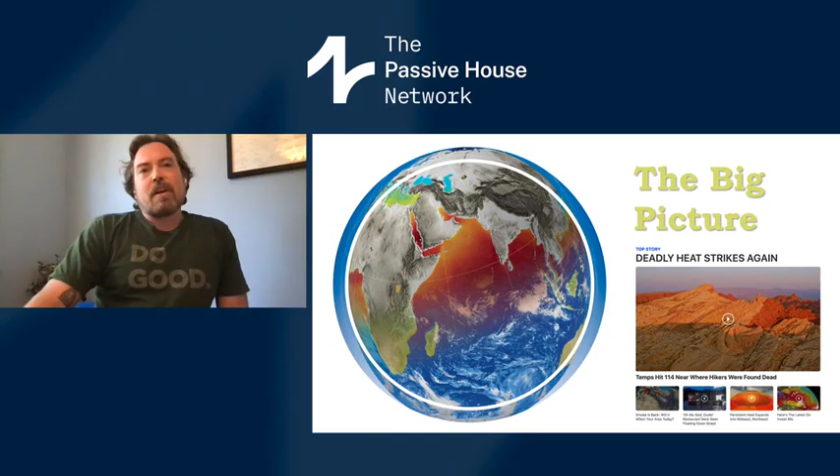So before we dig into the climate mitigation kind of subject, I want to talk a little bit about this right to health and kind of a lean towards social equity in the built environment. The right to health as an official construct—in 1966 the UN put together this covenant on economic, social, and cultural rights, which included a right to health. Turns out the US Constitution actually has a right to health. So all the more traditional conservative builders that love the Constitution should say, actually, you know what, our Constitution requires that we build healthy buildings. So that's cool to know.

The way I like to put this is that all people should have the right to health in the homes where they live and the buildings where they work. So what is healthy? It's a lot more than the lack of unhealthy ingredients. To deliver health in a building requires using good ingredients, but also putting those ingredients together through proper design to make sure, say, rot and mold don't occur. There's hundreds of things that go into this, really, but just some basic top-level summary.

Enclosure systems need to avoid toxic ingredients, so no more stuff like spray foam, and they need to dry faster than they get wet. We need to optimize indoor air quality through having non-toxic finishes, furnishings, and cleaning throughout the building's operational cycle, and continuous heat recovery mechanical ventilation. Most audiences, I have to fight for this one—I think in this audience, that's pretty much a given.

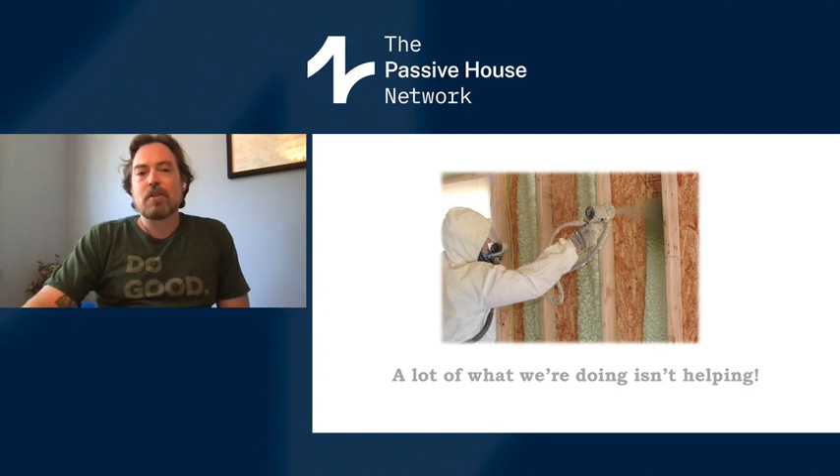Unfortunately, too many buildings, even certified ones, aren't always delivering holistically. I know we put our best efforts into doing this. Most of the colleagues I've worked with in this industry for a long time do incredible work. But there are two failure points that occur still too often: moisture-driven failures and health impacts associated there—just general health in buildings. Are the materials being used the healthiest materials for the occupants? And then, as my buddy Chris Magwood put it, the carbon elephant in the room: what is the embodied carbon impact of the materials we use to deliver high performance buildings if we're looking at the whole life cycle?

This can be summarized as what I call the efficiency trap. In the 1970s, we thought: shoot, bad building's not working out. We need good building—it should be healthy, comfortable, affordable, low carbon, durable, socially equitable. Great, but good needs to be quantified. Green's too political, so let's talk about it as energy efficiency. Cool, solid plan. How do we do it?

Let's maximize efficiency, collect data focused on proving efficiency was delivered efficiently and that it made people more efficient. And then you're kind of starting to think that's not really the original goal. And it's like, okay, well, we'll sneak in the green—if it's efficient, it does everything good, right? Efficiency solves all problems. Okay. And then, wow, efficiency really caught on. There's certification systems, et cetera.

And now Passive House perfected efficiency. The world is saved. And then, oh snap, it turns out that high performance just amplifies things. It might look really nice in energy models, but we need to take a much broader perspective of what materials are being consumed, what carbon impact they have, what health impacts they have, and look at it from a more holistic standpoint than efficiency alone.

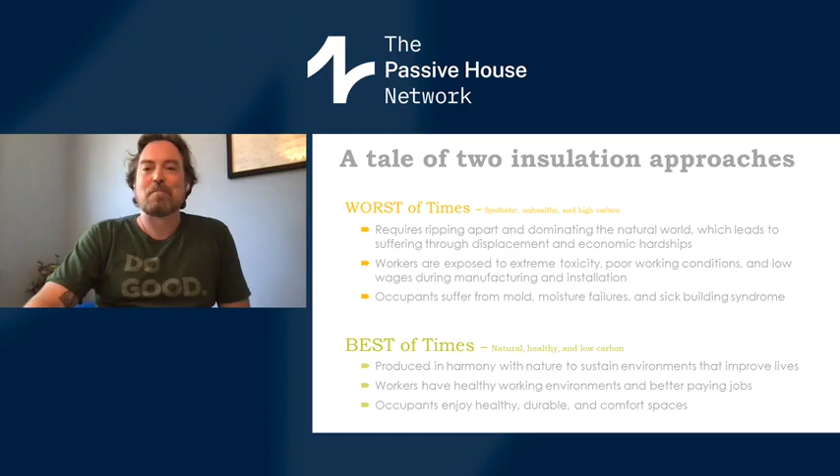One of our biggest problems is that we dissociate ourselves from the reality of things that are designed. And then when it gets to the job site, it still happens because we just say that work sucks, let the less privileged people do it.

To me, this is unacceptable. It's something we need to stop.

So the 5 factors, what are they? It's a design tool, it's not intended to be a certification. It's a guide for integrated design of holistic systems, and mostly for choosing materials that are actually going to meet your project goals.

One of the things worth mentioning is it works with high performance or low performance budgets. I know we're focused very much on high performance, so I won't spend too much time on this, but it is worth mentioning that good low performance actually can be great.

It's cash flow positive from day one. We're 105% net positive, including charging an electric car. And it's a healthy, durable, comfortable, and extremely low carbon home.

So for people who can't afford high performance, good building is still an option. In other words, the way we put it is everybody gets good building, right?

We still encourage every building to try to meet Passive House standard. We want buildings to maximize their efficiency, but sometimes people can't afford that complication.

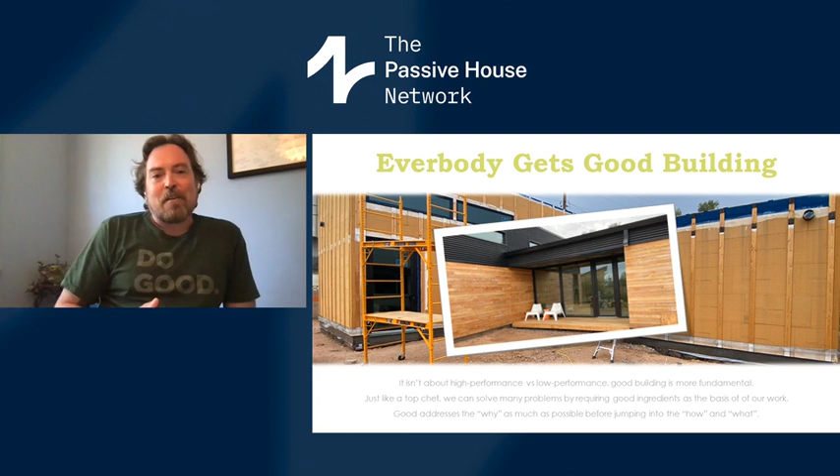So Zack Semke had put this really well talking to Chris Magwood, I believe this was on Twitter a while ago, as a concept of what good building could be: passive house plus clean energy plus carbon storing materials equals good buildings, right?

So dig into this stuff. The clean energy side and the life cycle carbon impact, including upfront embodied carbon, or what's often now called material carbon emissions. So the first step in my process is calculating for context and climate. What kind of building is it? What kind of operational energy are we expecting it to consume? So what's our predicted EUI? Converting that to kilowatt hours per square foot per year so we can look at the local grid.

And say, okay, how much carbon is there per kilowatt hour? What is the pounds of CO2 equivalent per kilowatt hour of electricity? So instead of just thinking efficiency saves some carbon, let's actually look at how much carbon is saved per year by calculating it based on the local grid the building's connected to. Now if you're off grid, this is a different thing. But if you're connected to a utility, they have to provide these numbers every few years in power mix reports, so you can find these numbers and do this.

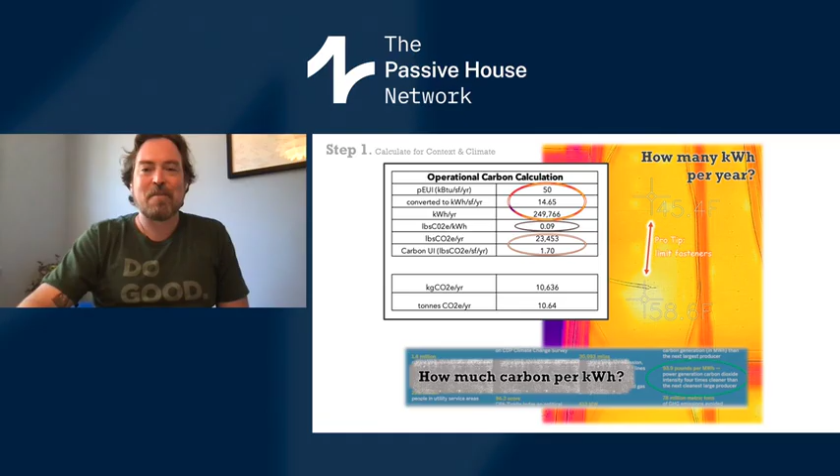The first part, which is what we typically now call upfront embodied carbon or material carbon emissions, is the process of extraction, processing raw materials into building materials, manufacturing those into final products, transporting those to the job site, and then installing them in a building. There's also an end of life carbon impact that we need to dig a lot more into, but we're not going to focus on that today.

So how do we know these things? There are global standards for this. They're summarized in what are called environmental product declarations, or EPDs, which usually include what would be considered a life cycle carbon analysis as part of it. When we're looking at the material embodied carbon or material carbon emissions, we're usually looking at a specific part of these EPDs that typically represents about 70 to 80% of all the life cycle emissions.

So this is trying to take a look at the biggest chunk that we can understand most accurately. I will say that this type of analysis has reached the point where it's meaningfully accurate, but it has a way to go in precision, as all good science does.

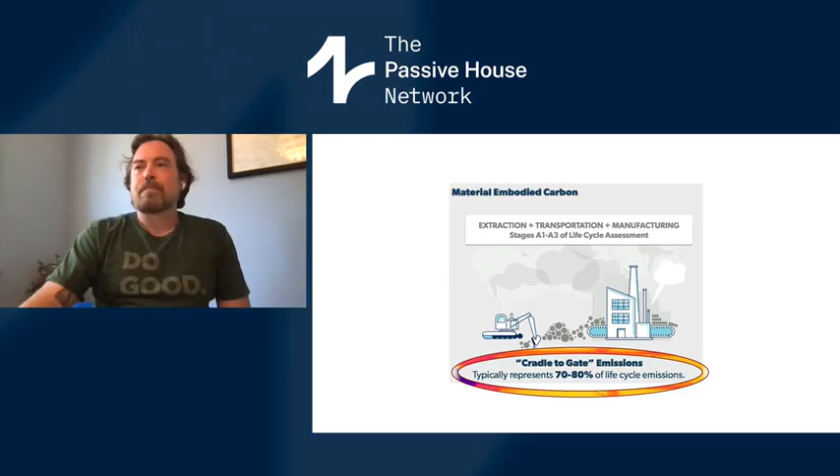So one of the areas we found really worth focusing on is the embodied carbon of insulation. Concrete can be really hard to change, really hard to control what the local concrete companies are providing as far as mixes are concerned. I definitely suggest trying to specify low carbon mixes.

They're more available now, but who knows if that's feasible. Finishes, clients tend to have a lot of strong opinions on, but no one's really caring that much about insulation. And it really is kind of our secret weapon against the climate crisis to switch from high carbon impact insulation to carbon storing insulation materials.

So some materials, spray foam, XPS being the biggest culprits, have very, very high carbon impact. I like to think of this in pounds per meter cubed or something like that. That's the general way we think of these things. Kilograms is often used, but Americans understand pounds better, so it's usually worth converting.

And then we have carbon storing materials: wool, wood fiber, dense packed cellulose, cork, hempcrete, straw bale. Straw bale is amazing, what you can do with it, as I'll show you at the end.

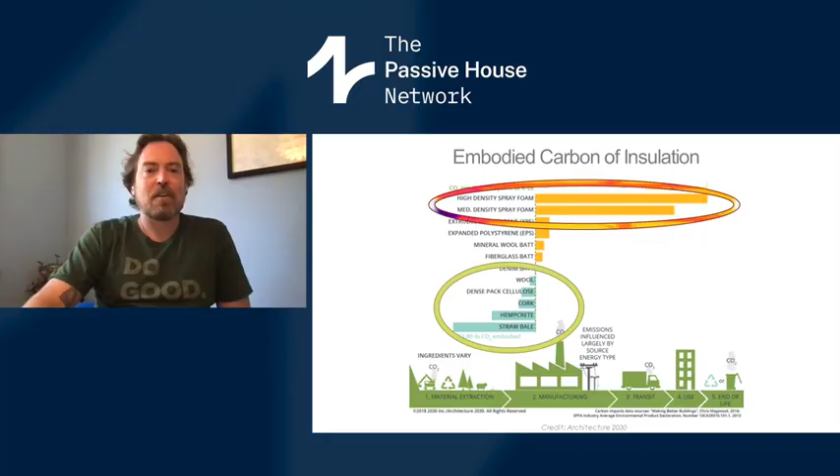So there's a tool now put together by the Builders for Climate Action. It's free to use. It's called BEAM, and it stands for Building Emissions Accounting for Materials. What you do with BEAM is input a bunch of data into effectively a fancy Excel spreadsheet. It's now on Google Sheets.

And after you put in all of your project info into the spreadsheet, you then go through different tabs to select your material choices for different elements of the building. So showing an example here, looking at subgrade perimeter insulation for slabs, slab and grade foundations. This is our Vali Mews slab.

If you use EPS foam board, on average that's about 2,152 kilograms. If we had chosen to use XPS foam board to get that theoretical extra R1 per inch compared to EPS, we would have had 10 times the upfront carbon impact, which would significantly affect our overall outcomes of this building. So this kind of decision is extremely important—which material you use.

And the one with the higher R value isn't always the lowest carbon overall. Often it isn't actually. So let's look at exterior insulation.

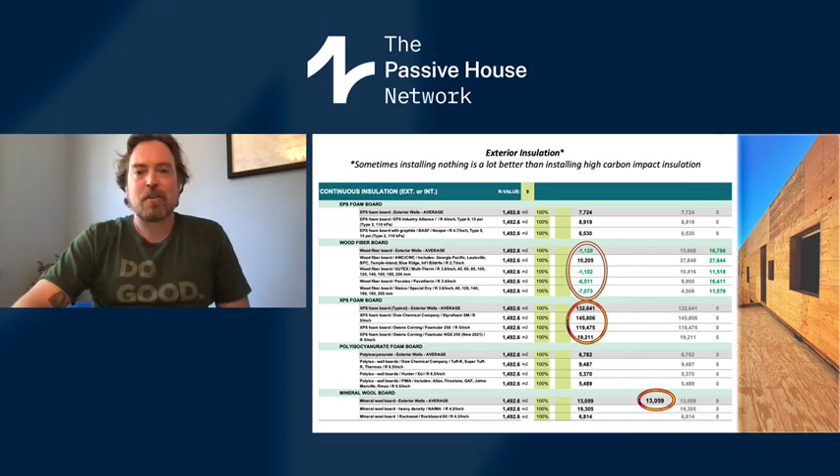Mineral wool is what had been originally specified on our project by the architect. A lot of locals wanted to switch it to XPS, but as you can see, that's an insanely high carbon impact. We ended up going with wood fiber board because we had the ability to find net carbon storing materials that helped us save a tremendous amount of carbon impact on this project.

A little thing I like to mention, because people always bring up aerogel or vacuum insulated panels for their super high R value—these materials have just as high of a carbon impact as their R value number. What I'd say is space age materials aren't worth using on Earth. We don't need that extreme of a performance, and it's not worth the carbon impact.

So looking at the carbon use intensity for 20 years of a Toronto two-story home—this is something I'm borrowing from Builders for Climate Action—high carbon, low efficiency buildings, obviously, are the worst. But what's interesting is that a high carbon, high efficiency building, like a passive house built with spray foam and XPS, really doesn't save that much carbon overall. This is looking at a 20-year life cycle here.

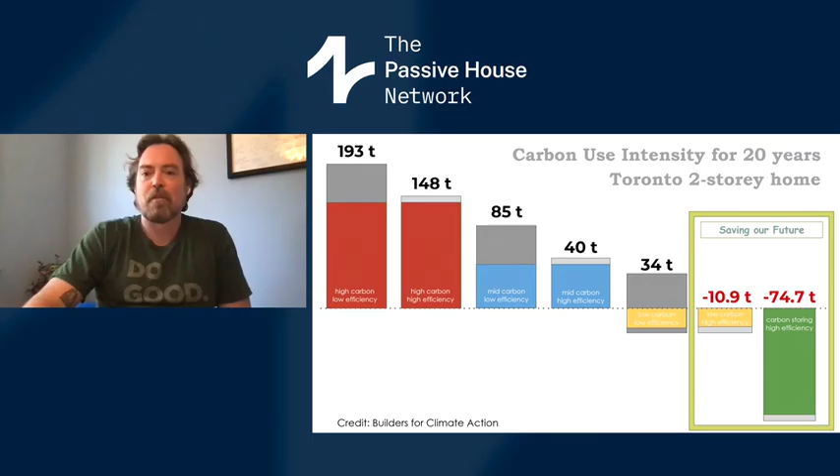Mid carbon, low efficiency buildings save a good amount of carbon. Mid carbon, high efficiency buildings—now we're getting somewhere, that's pretty exciting. Low carbon, low efficiency, interestingly enough, is actually way lower carbon impact than high carbon, high efficiency. But where we really need to get to is either low carbon, high efficiency, or carbon storing high efficiency. This really gives us a good shot at saving our future, or however you want to put that.

So this is that backyard cottage I showed you earlier. If we had used Phoenix average building materials—spray foam, XPS insulation, and all that stuff—we would have had 152,000 kilograms of carbon dioxide equivalent up front, and that would have represented 14 years of operational carbon payback.

Instead, by using low carbon materials, wood fiber, sheep wool, that kind of stuff, we reduced that to less than 30,000 kilograms up front, which represents a full carbon payback in less than 2.8 years, even in Phoenix, where there's actually a very, very low carbon per kilowatt hour grid.

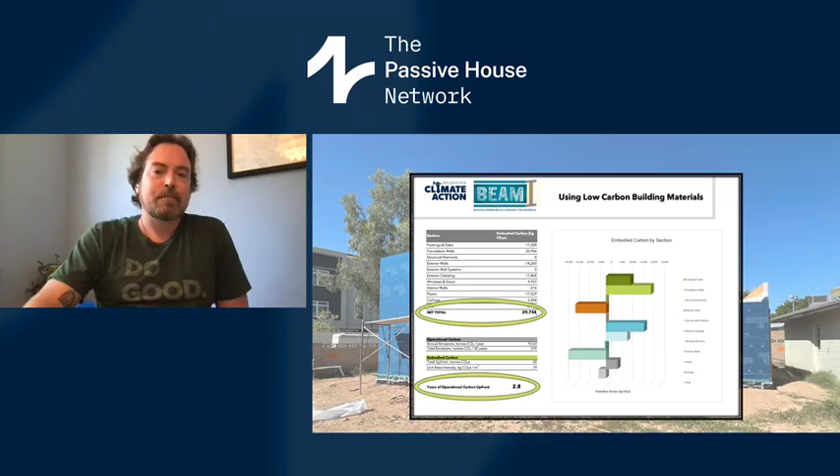A huge joy and honor recently is that our Vali Mews project, the one we're doing in Phoenix that I've talked about a little bit, is 4 units intending to fill in this concept of missing middle housing. It really is a form of a new all-American home that we're trying to promote. The other thing we're trying to promote about it is not just building this micro community, but having the best practices of health to the point of what we call performance enhancing building.

And we're also trying to show that you can really minimize the carbon impact up front using relatively straightforward construction approaches.

RMI, Rocky Mountain Institute, wrote a report called The Hidden Climate Impact of Residential Construction. If you haven't read this, please go download it and read it—it's incredible. But the key thing I want to share today is they came up with an average upfront carbon impact per meter squared, determined from 921 model homes across the US, Canada, and Europe. So we're looking at 184 kilograms of CO2 equivalent per meter squared as this average number we can use. So now we have a baseline to compare things to, and that's very exciting.

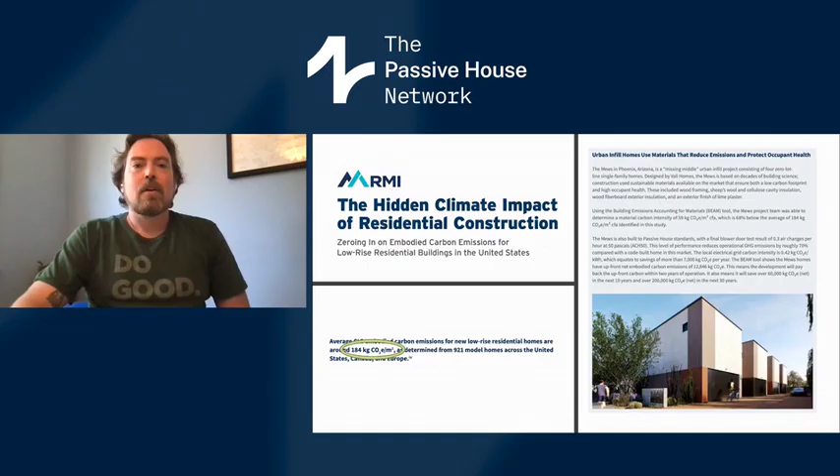So looking at our Vali Mews project, if we'd used foam insulation for this project, we would have ended up with foam in the walls, the roof systems, et cetera, creating a total of 388,000 kilograms, which ends up being 447 kilograms of CO2 equivalent per meter squared. So that's almost—or more than double, rather—the average upfront impact. That is insane.

Our intent is to help build a healthy building that improves the world. Clearly, neither of those outcomes would occur with foam insulation.

So looking at concrete, something that we all talk about as being one of the highest carbon impact things, what was really surprising to find out is that the foam insulation in this BEAM model, using market averages for XPS, closed cell spray foam, etc., would have been over 10 times the impact of the concrete used in this building. So it turns out concrete, yeah, let's solve that.

But the first thing we need to do is solve insulation. It's way easier also, because concrete is a great building material other than the carbon impact, whereas foam insulation doesn't typically meet people's durability, performance, or health outcomes either. So there's huge benefits in switching to carbon storing insulations.

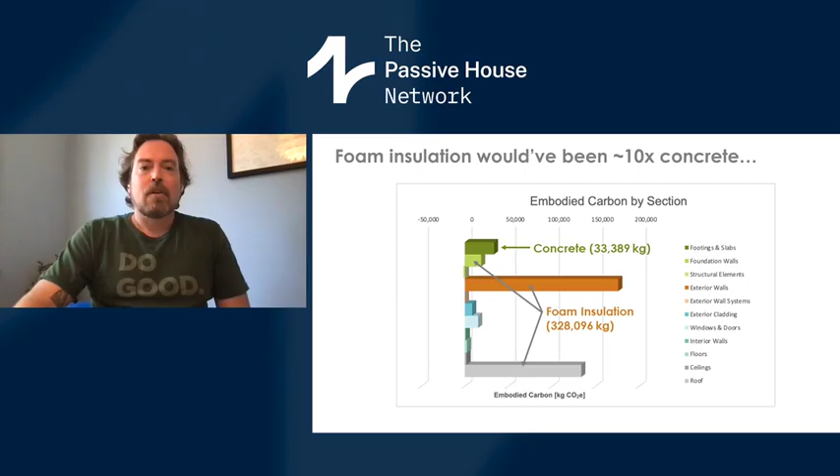So obviously we used good insulation. This is my older daughter stuffing some Havelock wool in a little gap space. And there's me walking around the perimeter looking at some of the wood fiber insulation that we had to do some pretty advanced stuff to protect from moisture. But anyhow, that's not this presentation.

So Vali Mews with good insulation, we still had the same footing and slab impact. We used a recycled EPS for our foundation walls, wood fiber for our exterior walls, and blown cellulose for the roof system. By doing that, we were able to reduce concrete so it's now 65% of the total impact, rather than only about 10% of the total impact in the foam scenario.

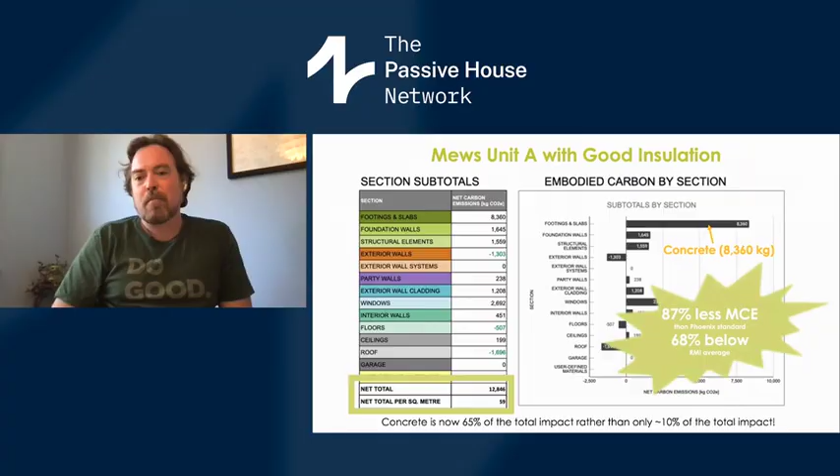But more importantly, what we were able to do is create 87% less material carbon emissions than the Phoenix standard, which is 68% below the RMI average that I presented of 184. And this is per square meter.

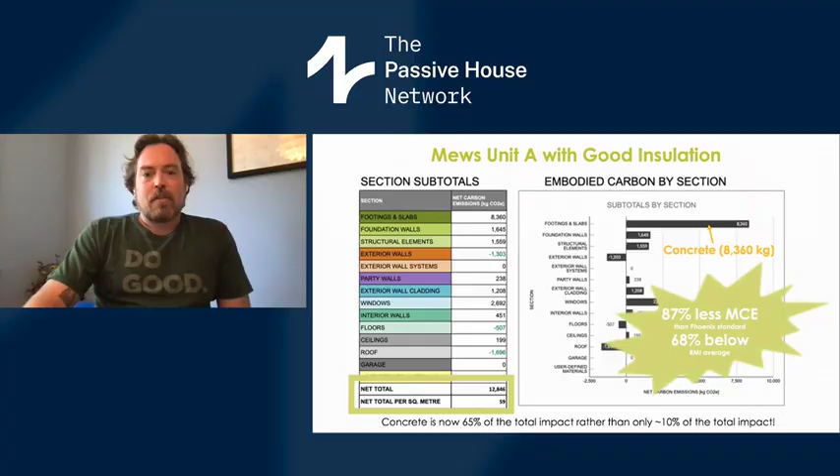Here's the living room with a wood slat sound wall that's placed over sheep wool insulation. The sheep wool's there for the low carbon, the health, and for helping modulate humidity levels. We found our buildings with the wool insulation exposed as such have been able to stay in a more comfortable humidity level, even though it's very dry outside in Phoenix.

One of the big problems we have is humidity levels are too low, and that causes viral transmission issues, itchy eyes, all kinds of gross stuff if you have humidity levels that are too low. So the point is, the healthy low carbon materials have worked way better than conventional synthetic materials in the performance they've delivered and also the carbon impact.

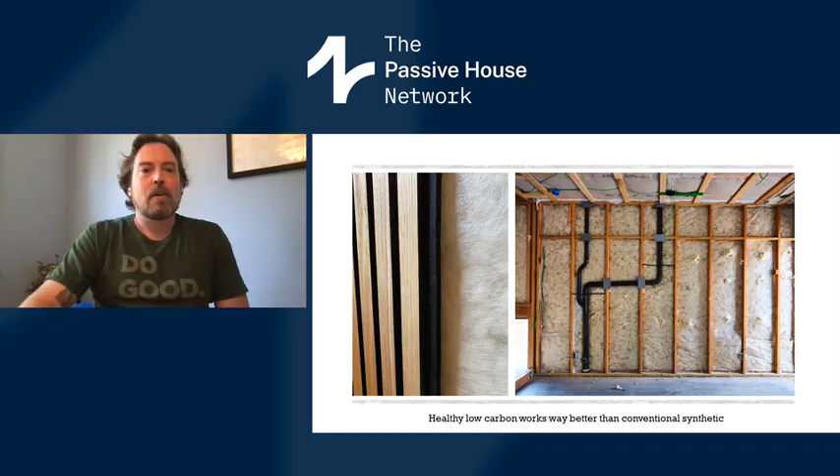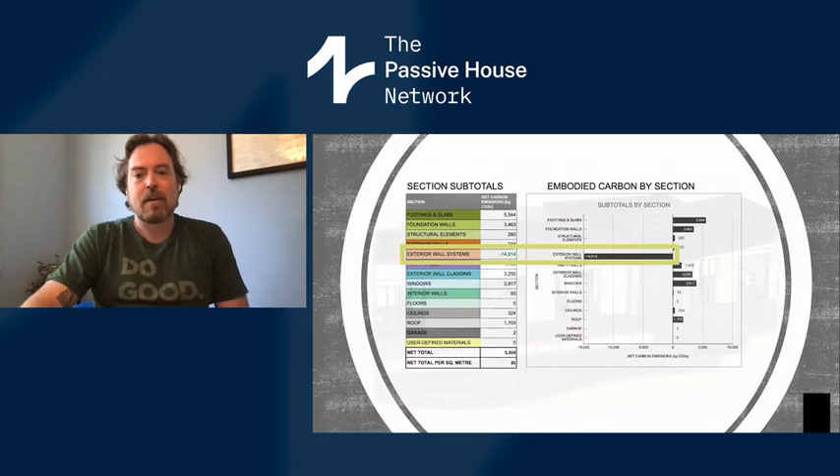So up next, we have a project called Dancing Raven. It's going to be with rammed earth and straw bale, but also meeting passive house levels of air tightness and insulation. Using those materials, straw bale in particular, allows us to save a crazy amount of carbon impact, which brings us all the way to 81% less material carbon emissions than that RMI average. So this is another step in the right direction.

Still haven't gotten to carbon neutral up front. We're working on trying to get there.

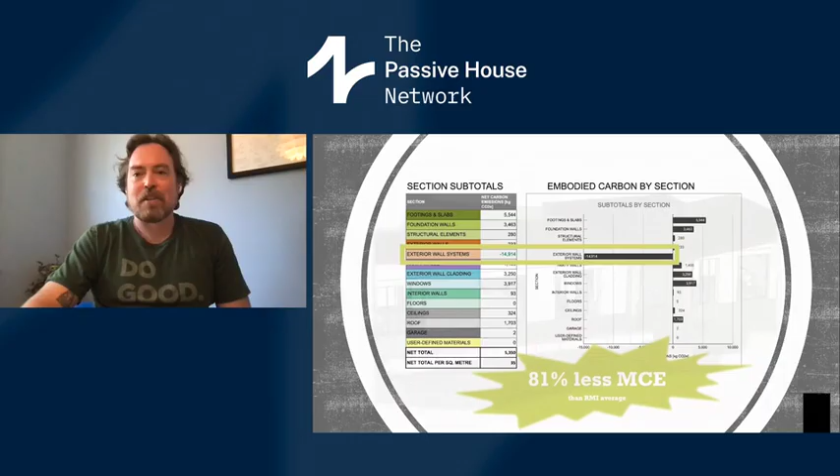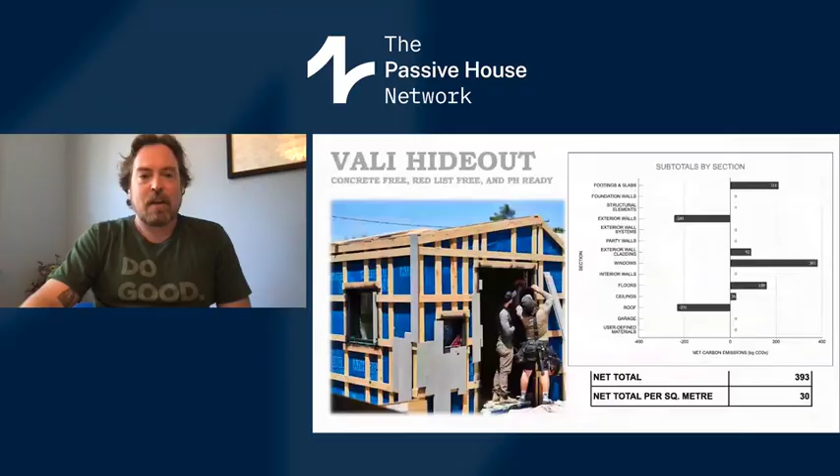And then another project we're working on, we're calling it the Vali Hideout. Shout out to kind of the desert cowboy finding a shady place to hang out. This is a concrete-free, red list-free, and passive house ready building. Obviously, with the size of a backyard shed or office, passive house is a very tough thing to do, but the air tightness levels are going to meet that. We're using T-stud, the full system, to reduce thermal bridging dramatically, using passive house compliant windows, etc. And with all of that put together, just blown cellulose insulation. So very standard, very easy to build.

The Phoenix carpenters have had no problem with this, whereas the other stuff we've done, they've definitely had some problems with. We achieved 84% less, but even the ground screws still have some carbon impact. So it's less than concrete, but still stretching towards that zero or carbon storing up front.

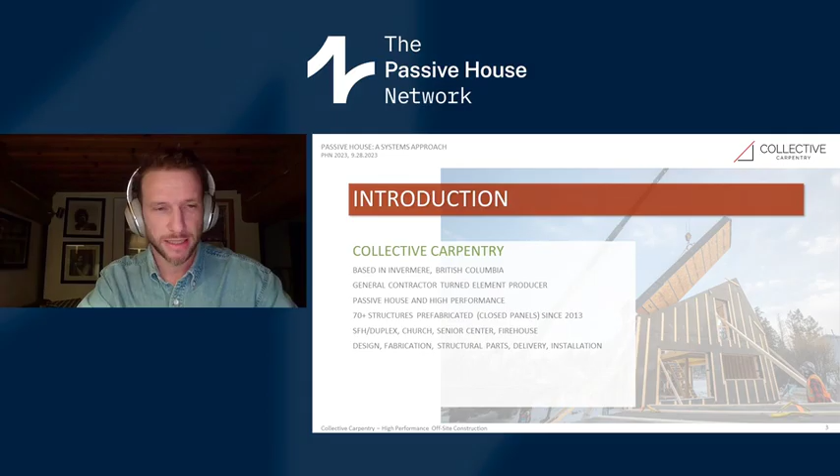In 2022, we released some pre-designed homes, and this is really our effort to just put into practice everything we learned about good design and good material selection and good building systems, and really offer something to the market that at least acts as a good launch pad from which to find something that clients are looking for, because sometimes they want a good home, but a custom home design process is a little bit out of reach.

We also last year revamped our standard details, which is partly for internal use, just for clarity of sort of the direction that we're going, but more so for outside designers we work with, who do anything from single family homes to larger multifamily projects. This is all applicable.

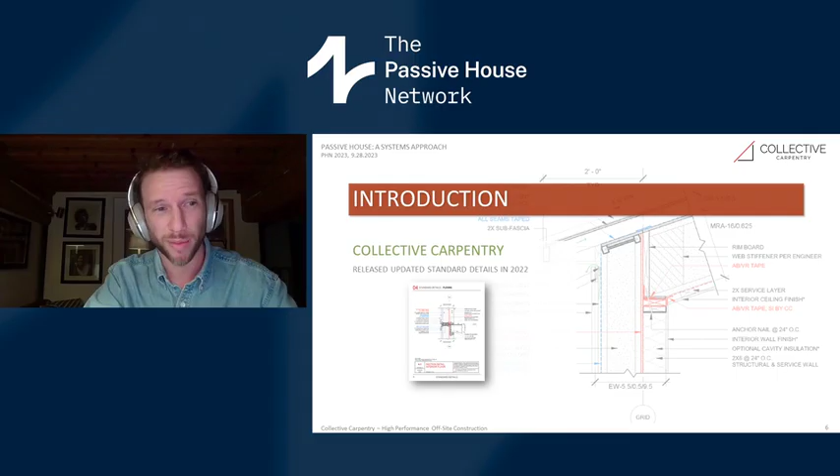We're currently working on our production improvements, and this is like how we're focusing on improving quality, speed, capacity, etc. Things like monitoring and forecasting of production in real time, reorganizing how we prep material for our production process, running 2 production lines, incorporating European equipment for moving panels, stapling, nailing, those kinds of things. Starting to get to this light manufacturing without necessarily full automation.

So for some definitions, the first question I had was, okay, how should we define this all-American home? And I just kind of cheated and asked ChatGPT, because I love ChatGPT, and ChatGPT gave me some answers. Heather suggested I shouldn't use this, but I just went ahead and did it anyway.

ChatGPT sort of said some things about single-family dwelling and architectural styles, some things about vernacular architecture, picket fence, the American flag. So what I thought is let's use this, we'll come back to it and discuss what about this might need to be changed with this current ChatGPT model of the all-American home.

Now, if we're going to overhaul it, overhauling is really the thorough examination of machinery or a system, with repairs or changes made if necessary. So we're going to be thinking about the home as a system on many levels, and the process of overhauling it being really looking at the system and asking where and why it's not working.

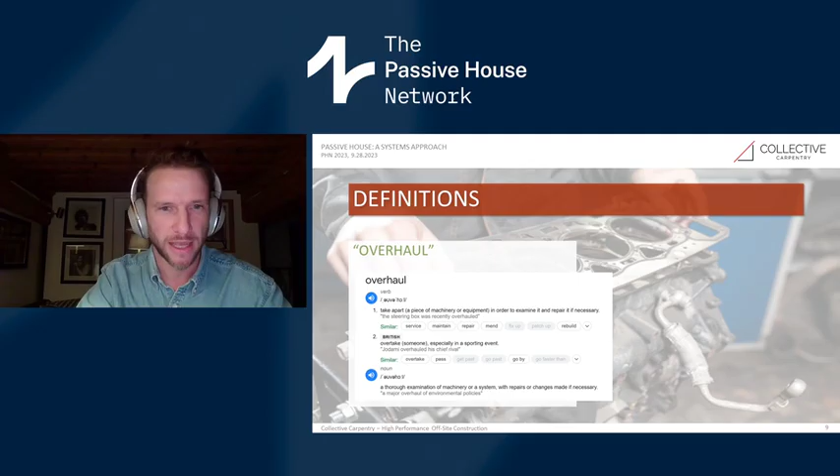And if we're going to take apart a system, let's agree that a system is a complex set of relationships and interactions between different parts. This can be large scale, like the climate system, or small scale, like a local food system, or maybe a ventilation system or an air tightness system. But it's organized, it's working together. It creates a whole that is greater than the sum of its parts.

I also want to briefly introduce some concepts around patterns, systems, and quality building. I was really fortunate to take a 4-day course with Monte Paulsen and Passive House Canada last fall about pattern languages in Passive House, and how identifying and recycling these patterns is the best, most reliable way to do Passive House multifamily at minimal cost. I loved thinking about these really specific and broad patterns we see in smart design, and how crucial they are to creating good projects that are built efficiently. So for anyone interested, take this course, read this book if you haven't already.

These are some of the patterns that Monty presents. Some of the things he calls patterns are, to me, maybe more systems, and I'll get into that in a second. I dug into this a little deeper out of curiosity and got into reading The Timeless Way of Building, his other seminal work from Christopher Alexander. And I really enjoyed his higher level thinking about the quality without a name.

And to me, this is what we need to be striving for as we look to revitalize the all-American home. I particularly like this use of three terms to describe quality without a name. You can really feel when a building is alive, it feels whole and it's comfortable. And on the contrary, you can really feel when a building is dead too. So keeping this in mind...

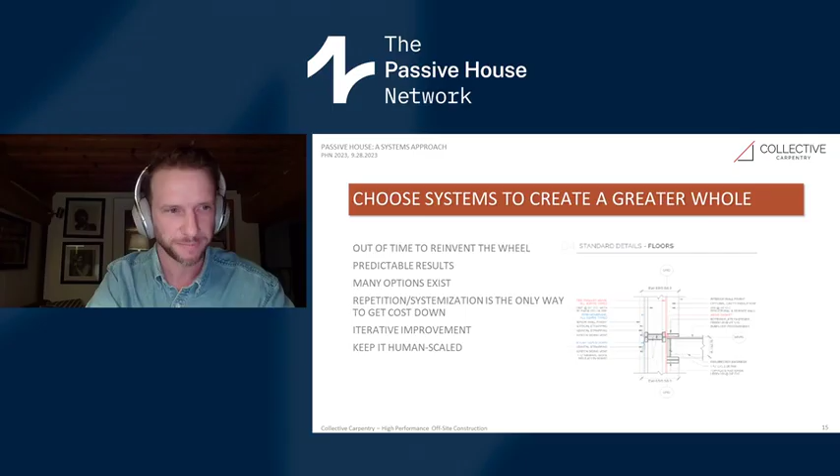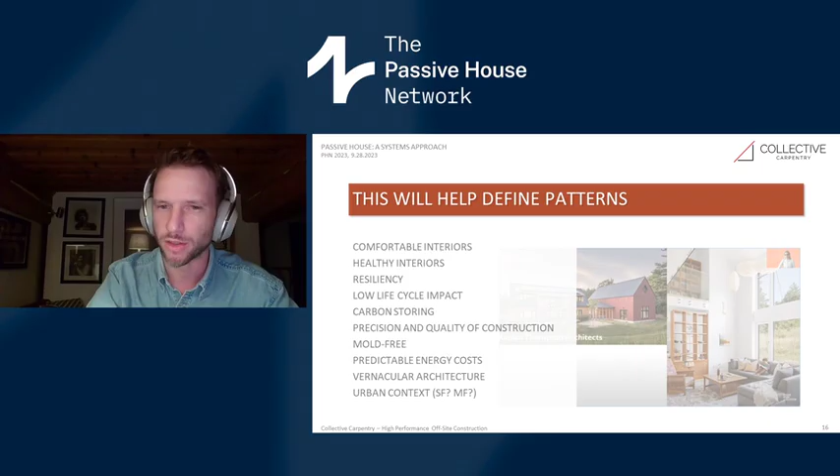Choosing these generating systems, as Christopher Alexander would call them, will lead to patterns. We've already seen these patterns become languages in passive house architecture, like Monty described in his presentation, and like Tessa Bradley of Artisans Group described in a recent presentation. But we need to see more patterns that also deal with quality, accessibility, and other things that passive house alone can't necessarily deliver. When we do, we'll create an all-American home that feels relevant and stable for the 21st century, one that lasts and is specific in its intention to provide a better quality of life for people on this planet, and that's what we're working towards here.

Now, in order to be more relevant in a changing climate, we need better building performance. So what's the best system? I think a lot of us are here because we agree that it's passive house. Why? Because it's really good at predicting results. Many of you who just started getting into this saw charts from European buildings showing a really close match between what the methodology and model said and what the actual results were. So that predictability is really important.

But what's passive house without a good system of execution? It's a nightmare. It's slow, it's expensive, its quality isn't where it should be, and it's really out of reach for most folks. So we need good systems to improve that time, cost, and quality.

This is where we feel offsite manufacturing systems come into play. They offer more predictability, and that can help give confidence to designers and building owners to do passive house. But in order to address local needs, it can't be rigid. Christopher Alexander says nature never produces the same thing twice—every leaf is different—so we can't do cookie cutter. We need flexibility, and we think prefabrication, the panelization of building elements, delivers this design flexibility so we can adapt to local and individual needs while still giving that predictability and confidence to execute the passive house principles.

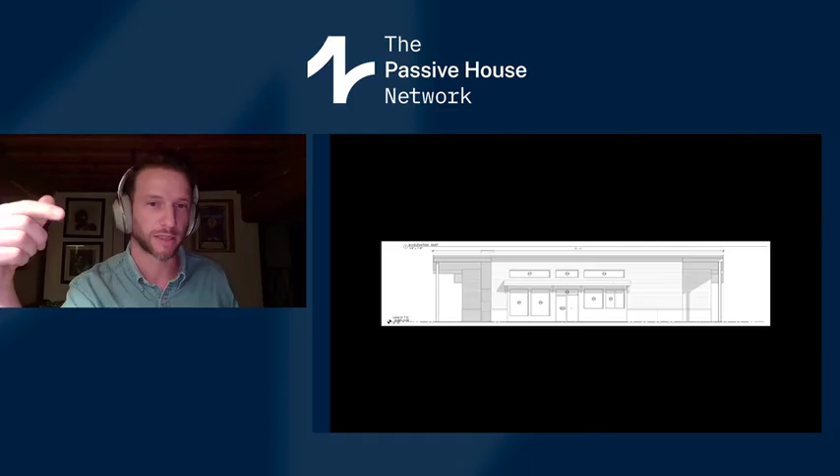I'm going to hand it off to Heather now, who's going to talk to you about how we incorporate this Collective Carpentry building system into the projects we design.

We still do plenty of custom homes and multifamily structures as we grow, but I think these homes offer something that should ultimately be more prevalent, as they are in Europe, where companies like Baufritz are building almost all wood-framed houses this way. My dream is really to see other small companies get into this market in North America—go inside, build panels, learn some tricks, and offer a better solution to building a quality home.

Thank you. Thanks, Craig. My name is Heather Mott, and I'm the in-house designer with Collective Carpentry. I'll be talking about how we at Collective think the new American home should be built. Spoiler alert: it's passive house, with prefab construction and low embodied carbon materials.

Our goal at Collective is to advance the industry in a way that is symbiotic with the environment. There are a lot of barriers to getting there, so to create the path of least resistance, we've developed a design guide, standard details, and pre-designed homes. I'll follow up this information with a case study and supporting analyses.

For those of you who haven't worked with prefab yet, we build the insulated, airtight structural envelope as panels in a shop, ship them to site flat-packed, and install with a crane, going from a foundation to a fully enclosed structure in just about a week or two.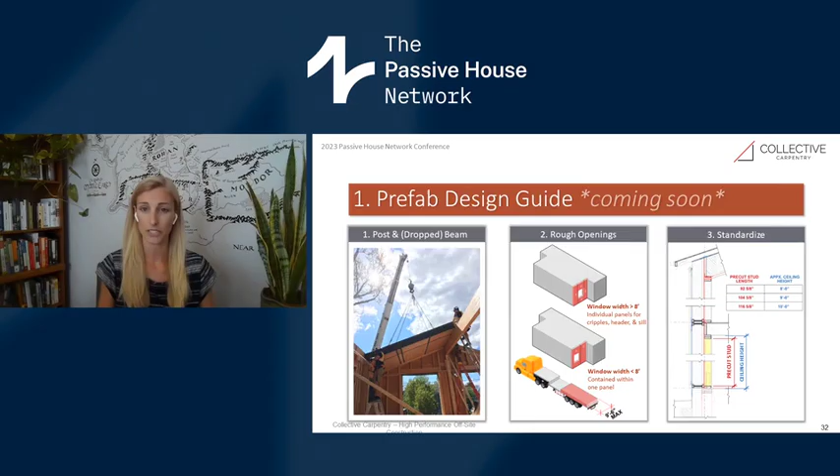As Craig mentioned, the standard details are another resource for architects and engineers to design for prefab. They show how panels integrate with other envelope elements, such as foundations and windows. I should really call these standard-ish details, because they're very adaptable—we don't want them to dictate the design. I learned a lot of this information the hard way, and we made this document so that you do not have to.

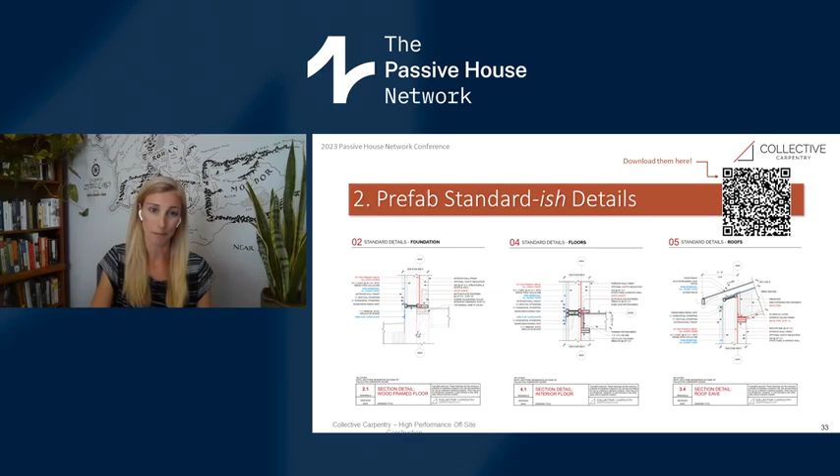We used these two resources to inform the designs of our pre-designed homes released last year. They are eight passive house-able designs with controlled customization options. Our goal with the collective homes is to make high-performance construction available to a broad market by reducing the traditionally high cost of design.

Sometimes manufactured homes have a reputation for homogeny and disregard for their context, so we're trying to break this stereotype. As Craig mentioned earlier, integration with the surroundings is critical for hitting high-performance goals. For this reason, we include 20 hours of customization time with every collective home. This time is used for creating a site plan and orienting the home, selecting appropriate assembly types for the climate, adjusting overhang distances, specifying mechanical systems, and so on.

So when we think of the next American home, this is what we imagine. The first collective home was built in Bozeman last year. It is the Calina Mountain design, with about 1,500 square feet of interior floor area.

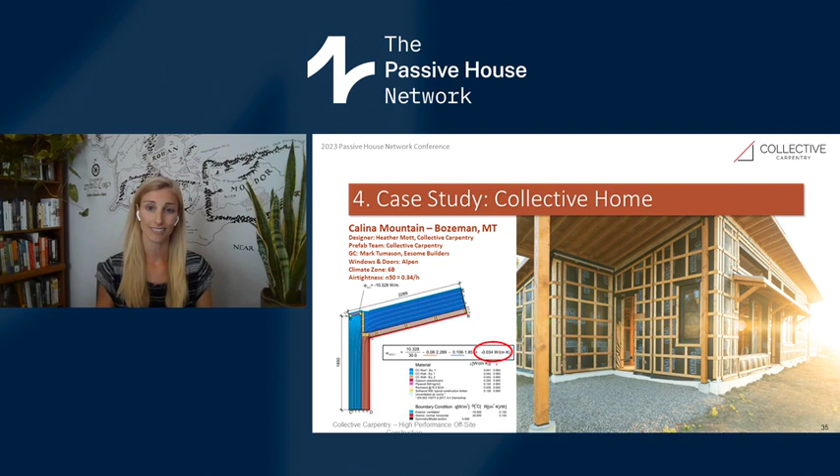Lucas highlighted the importance of healthy, low-embodied carbon materials. We wholeheartedly agree, so here's a look inside our typical wall panel. We use all wood-based materials and Pro Clima membranes. Our typical wall panel assembly is shown at the top left, and along the bottom is a production sequence of a triangular wall panel.

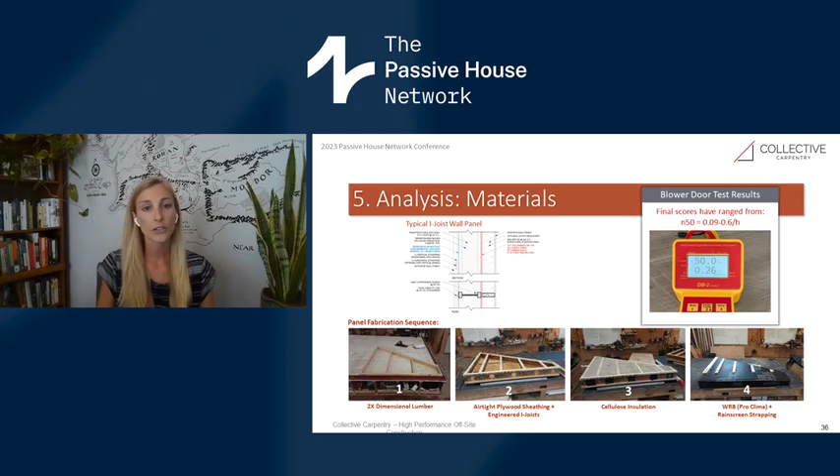As many of you already know, cellulose is a really great material. It's fiber insulation made from recycled newspaper, treated with non-hazardous chemicals for pest, mold, and fire control. Our blower door test results confirm this system is successful. I'd like to give a shout out to the crew at 475 — they're always our go-to team for material selection and sourcing.

Craig also used the BEAM software to analyze the embodied carbon of the Bozeman case study. This analysis represents our system relative to a high carbon alternative of equal performance. It doesn't represent the whole house, only the elements we provide with the collective homes — exterior walls, roofs, doors, and windows.

Our system is analyzed on the left, and the high carbon alternative on the right matches our system's R values, but uses rigid mineral wool instead of cellulose in the walls, and flash and batt instead of cellulose in the roof. The difference in net total emissions is substantial. Mineral wool is still a great option, but materials like wood and cellulose are plant-based and carbon storing, so some emissions from manufacturing are offset.

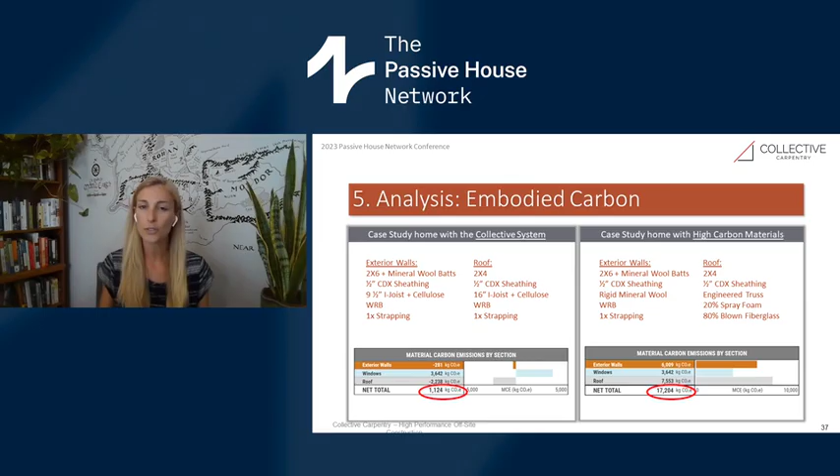So here we are, a conference full of passive house enthusiasts, trying to shift the building paradigm towards sustainability. Early examples of American home styles show that manipulation of environmental factors was an architectural problem out of necessity. In the 20th century, increased standardization led to a boom in housing, but with decreasing fuel costs, less attention was paid to energy efficiency. Moving forward, we need a scalable model for sustainable living that is symbiotic with the environment and promotes a healthy lifestyle.

The combination of passive house and prefab provides the scalability and quality that a new era of American building will demand. This would use the passive techniques of the past, and the standardization and technology of the present, to make the house of the future. Thank you.